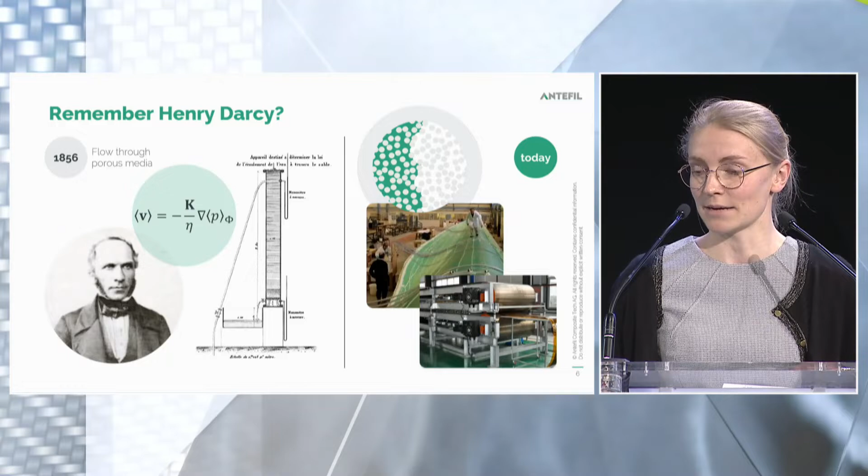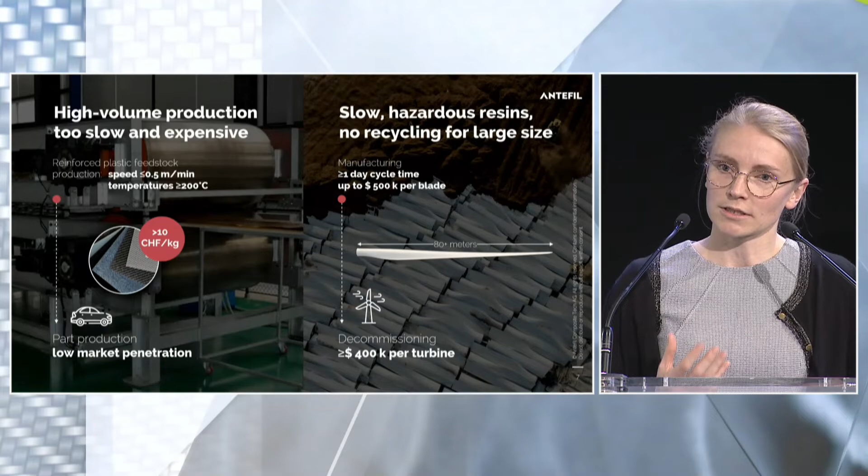For automotive applications, large series production is today achieved by rapid stamp-forming organosheets. However, these organosheets are produced by impregnating dry textiles with high melt viscosity thermoplastics at high pressure and low line speeds. This makes these preform materials expensive and limits their use in such a cost-sensitive market.

The other example are large composite structures like wind turbine blades that are today produced using vacuum-assisted resin infusion. Because of the curing of these resins, the production is slow and expensive. And because these resins cannot be recycled, we are producing kilotons of composite waste each year.

At Antefil, we have the solution. Our technology relies on hybrid fibers, glass fibers that are individually coated with a precise amount of thermoplastic polymers on them. Textiles made from these fibers turn into lightweight structures almost instantaneously, simply by applying heat and a little pressure.

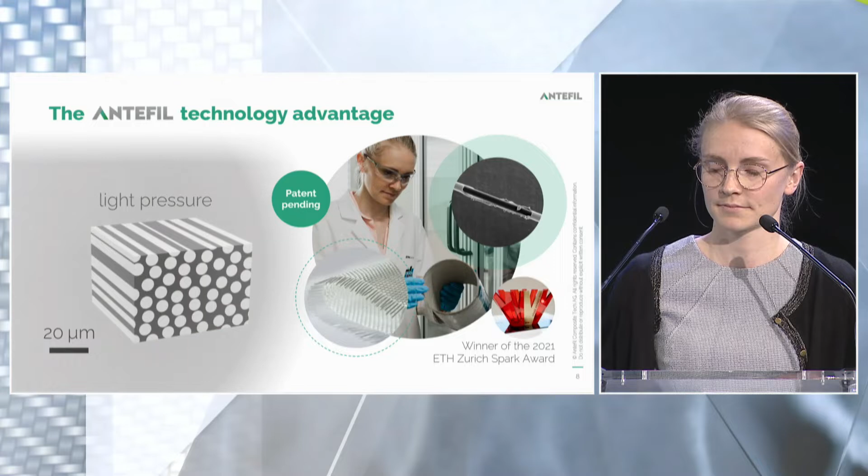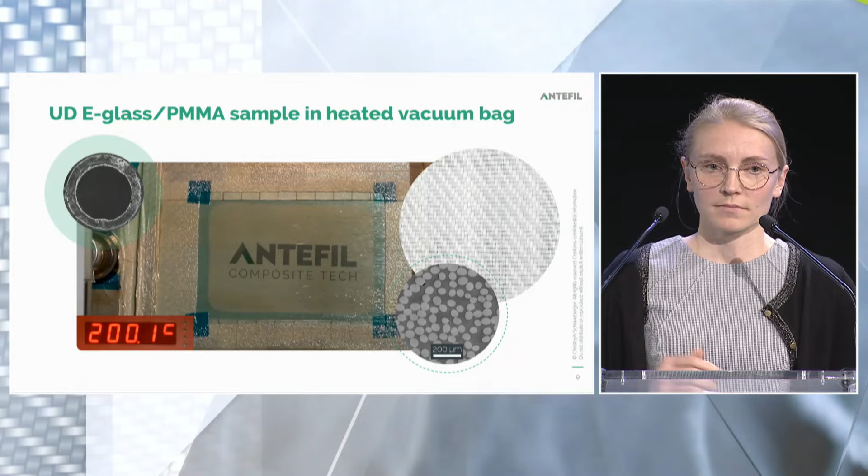We have successfully demonstrated the production of sample-sized textiles with our lab-scale fiber spinning prototype. These textiles can be consolidated into high-quality laminates with low-pressure consolidation, like vacuum bagging, because we combine reinforcement and matrix in every fiber. This ultimately enables the use of thermoplastic composites for large structures, but also parts with high lot sizes.

And now to Christoph.

Thank you, Nicole. So by entirely circumventing time-consuming impregnation and enabling a full fiber wet-out, Antefil's hybrid fibers reduce the cycle time in part production while improving the material quality.

And because we enable the use of thermoplastics, we offer our customers alternative joining processes such as welding. We don't have to work with hazardous thermosetting and curing reactions, and enable recyclability at the end of the product life cycle.

While various applications are conceivable for this preform product, we have secured interest in niche applications, the construction markets, and in automotive, and are running pilot projects with prospective customers there.

The experience gained with these pilots will allow us to then also enter larger markets like pressure vessels for hydrogen mobility, the aerospace sector, and wind power.

We will strategically position Antefil on the material side as a producer of hybrid fiber textiles. We envision an asset-light production model for which we will collaborate with established fiberglass producers and textile companies.

We will incorporate our developed coating stage into their spinning plants, and we've already signed interest from established fiberglass manufacturers and weaving companies for this purpose.

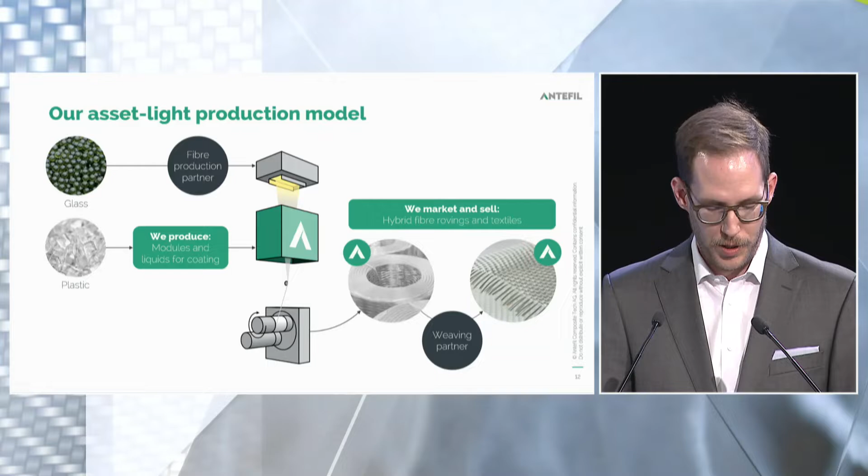So the team behind Antefil is an interdisciplinary team with complementary characters, and we combine over 50 years of experience in the composite sector. The core team is made up by Nicole, Paolo, Thomas, and myself.

And as an ETH Zurich spin-off based in Switzerland, we have spearheaded the development of this technology at an academic level. We've also been able to attract highly trained staff and top student interns for our technological and market efforts.

We are on a mission to advance the standard in composites production. And to scale our fiber production capacity, we are now offering an equity investment opportunity until the middle of this year in the size of $2 million US.

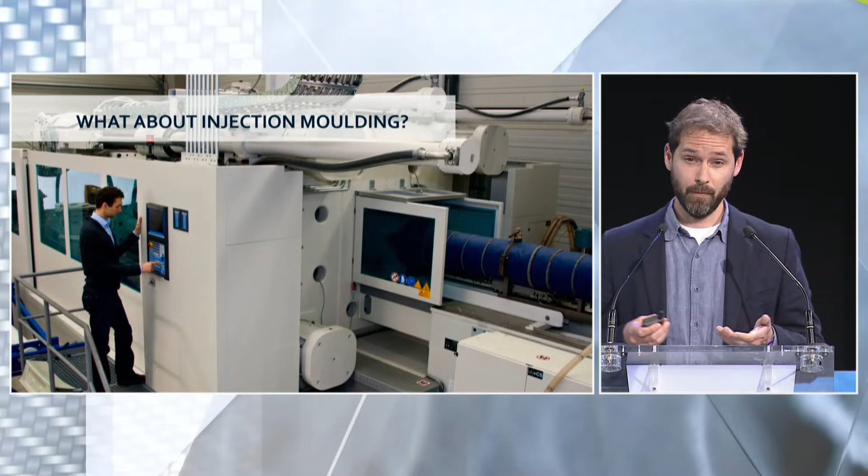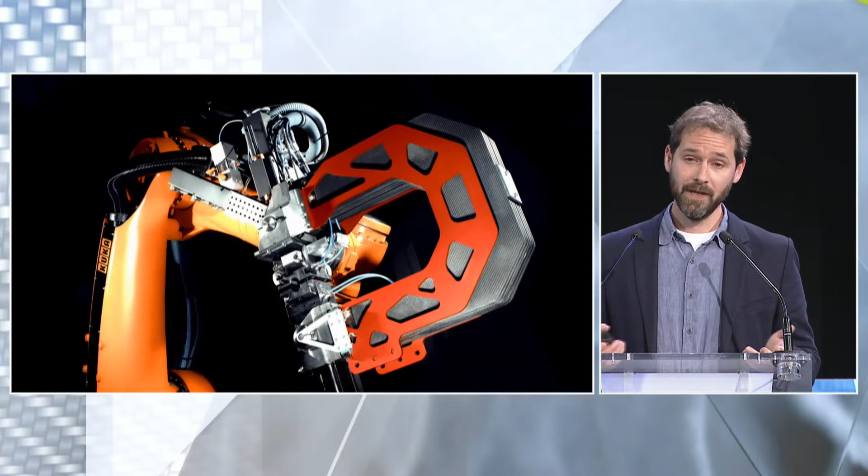For example, injection molding - the most common used manufacturing process in the plastics industry. I'm not saying it is outdated somehow, I'm just saying it is stationary. Again, what could be the next thing that happens to the injection molding technology? We can make it mobile. We from ANYBRID have succeeded in creating the world's first mobile injection molding machine.

And with that, we are leading to whole new flexibility and productivity in plastics processing. We call this machine Robin. Robin consists of a lightweight C-frame and is characterized by a weight of only 140 kilograms. Like this, it can be mounted on classical industrial robotics. Besides that, it's characterized by the big outreach capacity on the inside of the C.

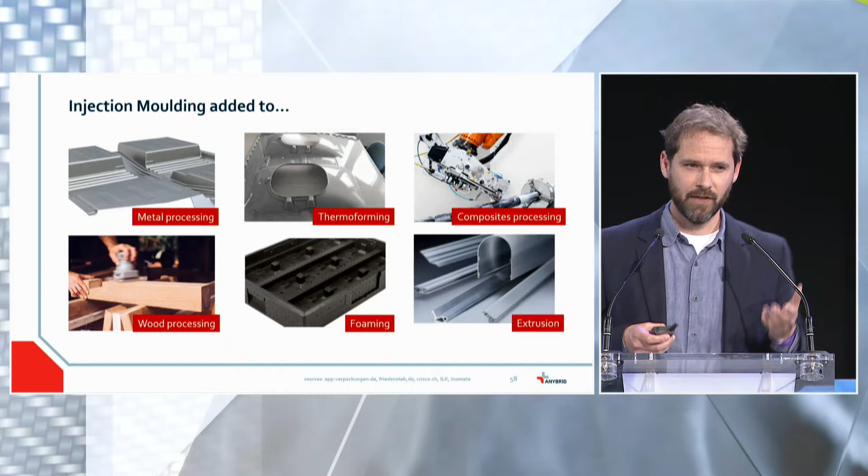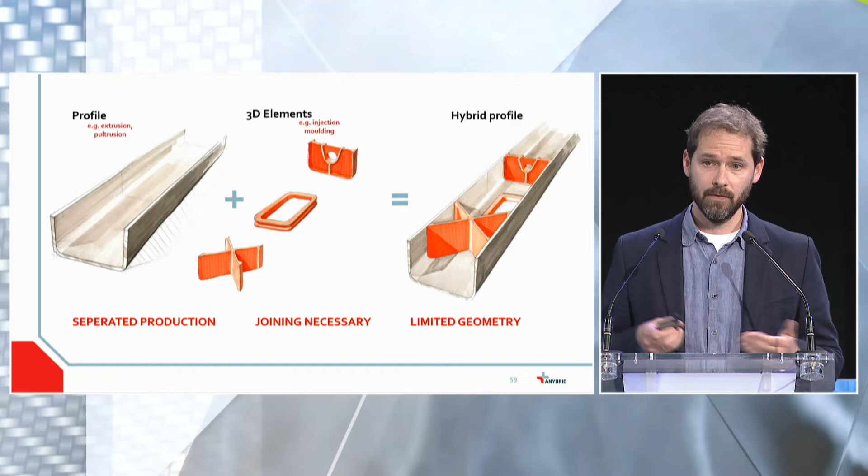So what can we do now with this machine? We can add it to other manufacturing processes like metal processing, thermoforming, or composites processing, or even wood or foamed material can be overmolded with our technology. But just think about the technologies, how we can overmold profiles in line. Because today, profiles and injection molded elements are completely separated when it comes to the production of them. There's always additional joining necessary, and the geometry for such hybrid profiles in the end is limited.

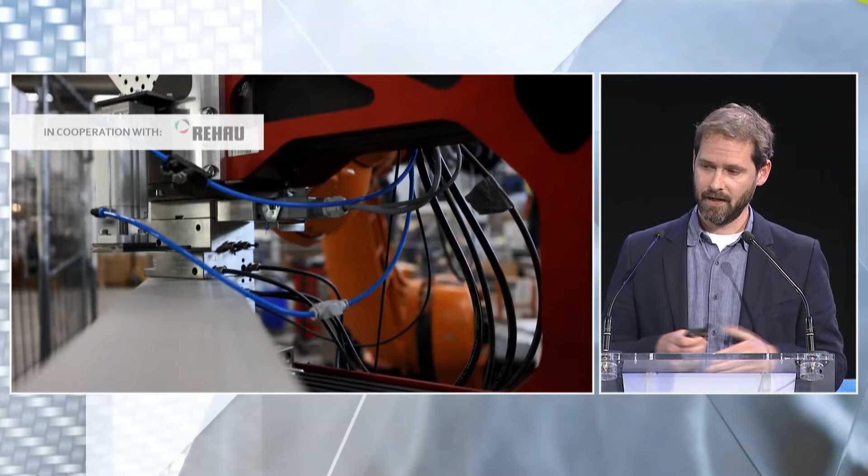We use this in cooperation with our first big customer, REHAU, one of the biggest plastics manufacturers in Germany, to test it inline during an extrusion. We are just flying by the profile, overmolding it with a functional element out of the same material.

And think about the market. There are over 5,000 profile extrusion lines that are sold in Europe every year, creating a turnover of over 2 billion euro.

And this is just, for us, the start, because we developed, with Robin in the center, an injection molding machine that can be directly integrated in a profile extrusion line, making it possible to overmold it directly in line. We are expecting to sell over 50 machines in the next 5 years.

And this is just the possibility to overmold in line. When it comes to offline functionalization, we are aiming for another market, the market of window frames. There are over 15 million windows that are produced and sold every year just in Germany and France, creating a turnover of over 1.5 billion euro.

And what is the most challenging part about windows is the assembly of them. And that's where we come in the game, because we created, with our Robin system, a joining concept to join the window frames directly with a higher speed, reducing the need for labor.

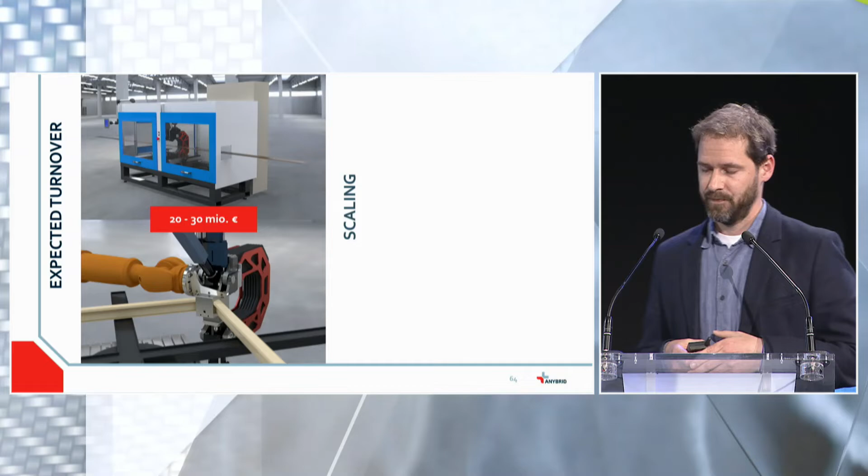in the traditional ways. We are expecting, with those and other applications, a turnover of up to 30 million euro in the next years. And we're planning to scale it on other areas in the automotive or aviation industry, or with other materials, overmolding metal or wood material. And we are already in discussion with a few manufacturers when it comes to joining technologies, joining C-frames.

Last but not least, I want to introduce you to the team. The team consisting of the one who keeps everything in his eyes, the mastermind, the networker, and the one who can just do everything. Altogether, we have experience of 45 years in engineering and have been multiply awarded in the last years.

With that, I want to finish my presentation. I want to invite you to think with me the next steps using our robotized injection molding system. Thanks for your time, and I'm looking forward to meet you at our booth in the Startup Village.

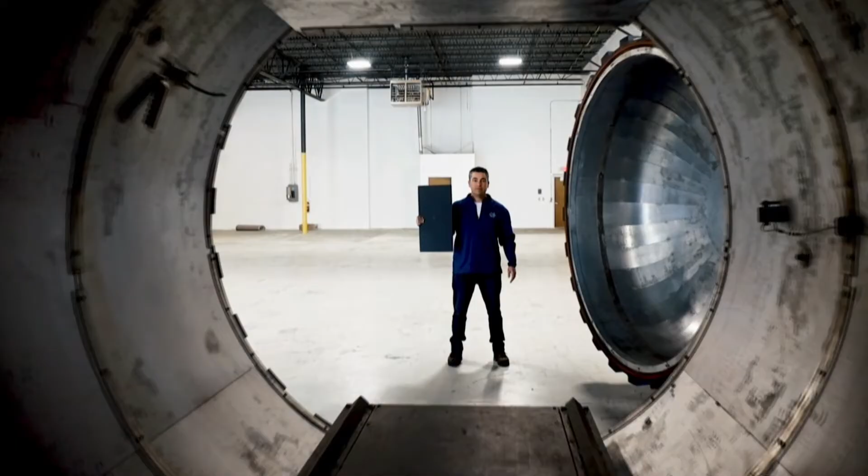Here's a quick picture of what Atomic 6 is all about. They said it couldn't happen, until somebody did it. This panel changed everything. Historically speaking, industry's best has achieved 80% of the theoretical limit for tensile modulus. This panel achieves 98%, just 2% away from perfection.

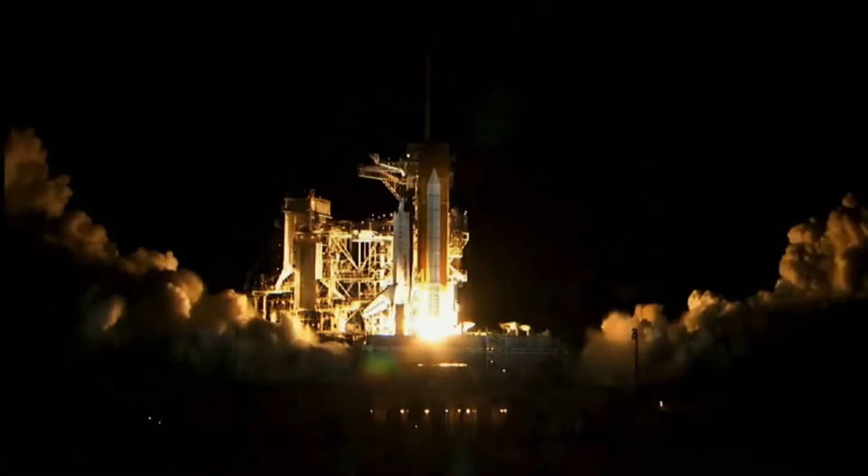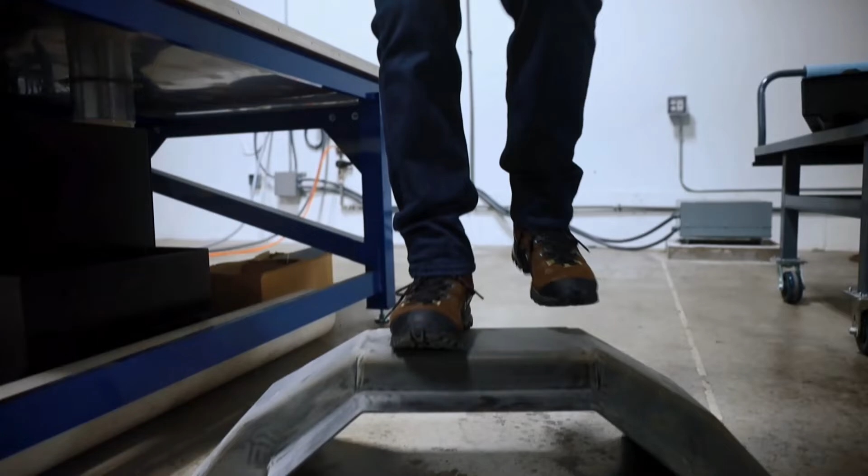We're applying our technology in 4 major verticals: space, aerospace, hypersonics, and ballistics. In space, we've made a chassis for a Mars rover prototype that's lighter than aluminum and stronger than steel. In aerospace, we've made a battery enclosure for hybrid electric aircraft. In hypersonics, we're developing a carbon phenolic panel to withstand speeds of Mach 5 - that's 3,800 miles an hour.

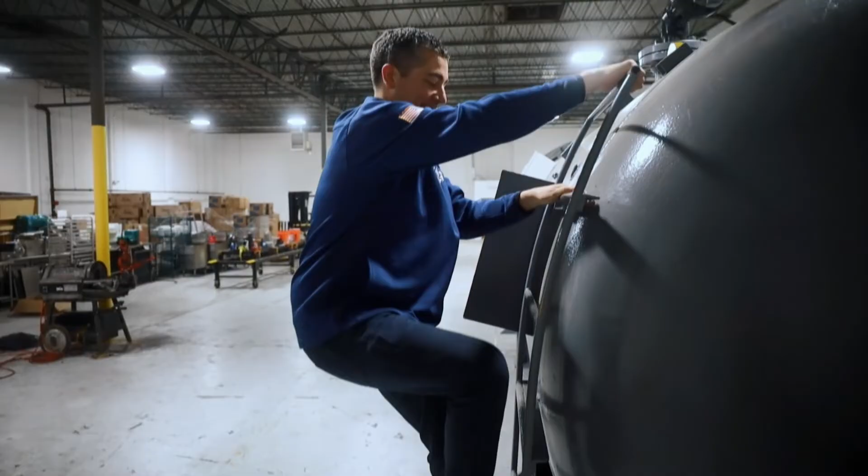In ballistics, our first attempt stopped a 9mm full metal jacket, beating the military standard for weight and thickness. The products we're making in each of these verticals have interstate, international, and interstellar implications. At Atomic 6, we invite impossibility, because we know impossible is the first step toward an entire generation's dreams coming true.

I'm sure you're all aware that prepregs are the benchmark material for high performance. You also know the problem with prepregs: they're expensive, have excessive resin waste, limited recyclability, stored in a freezer, and typically require long curing cycles. The benefits are that prepregs have well-established properties that have been certified for many programs and have a high level of performance.

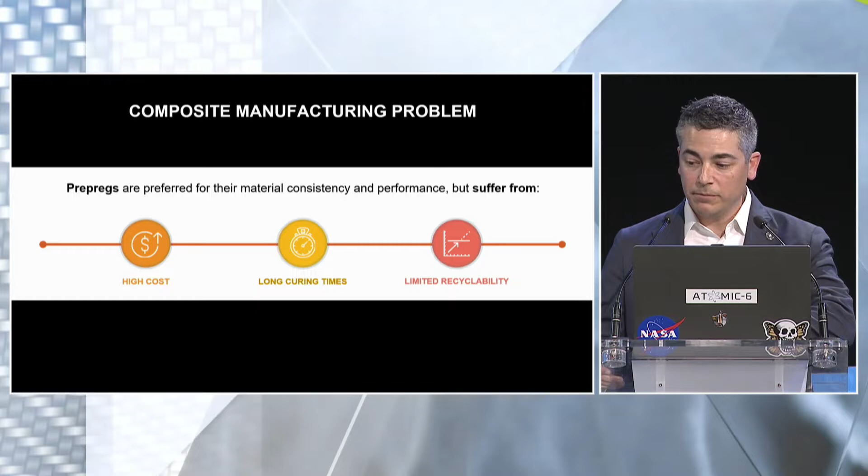We're disrupting aerospace, providing performance previously thought impossible - 120 times faster manufacturing at a fraction of the cost. Our proprietary mold design allows for all fiber and infusible resin types. I have 2 chassis here from the same mold. The first is an IM7 woven carbon fiber with high-performance thermoset, while the other utilizes recycled chopped carbon fiber and a recyclable thermoplastic resin system.

To meet growing demand for sustainable aircraft, we must utilize composites while drastically increasing production capability. The Atomic 6 process is purpose-built for opportunities just like that.

Over the next 2 years, the world will launch more satellites than in all human history combined. Space Force has funded a $750,000 project for us to develop higher performing support structures for solar arrays like the ones on the International Space Station. Once proven, this technology could help bring 5G Wi-Fi to every single corner of planet Earth through projects like SpaceX's Starlink and Amazon's Project Kuiper.

The next generation of fighter jets won't have pilots in the cockpit. The Air Force Research Lab has funded a $750K project for us to improve critical structures on its unmanned combat aerial vehicle.

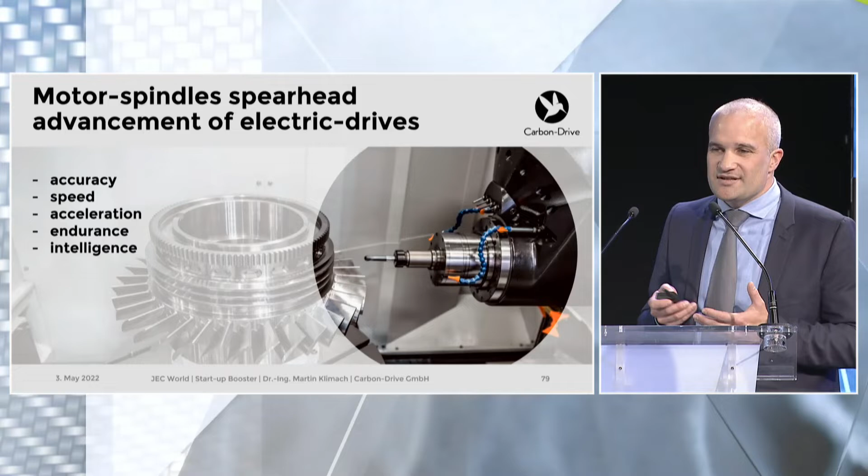So it stood to reason that if we make a carbon fiber motor spindle that can machine at the same speed and precision as a steel spindle, we would not only make a big impact on the machining industry—and which industry doesn't rely on machining—but also in the long run on electric drives in general. So after countless hours of research and meticulous product development, in the middle of 2018 we had our first all-carbon electric motor spindle. It can machine aluminium up to 4 times faster than a steel spindle at half its weight. It shows no thermal deformation, and in the milling process saves 40% of energy.

The first prototype is actually still running today in our production as our day-to-day spindle. But back then, we had something maybe even more important: we had formed the perfect team.

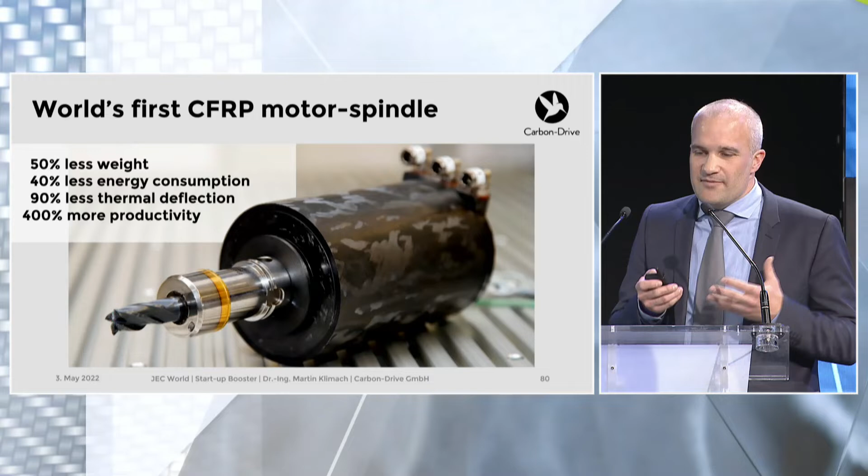We have Alex, who is our exceptional economical expert. We have Jan, who is a very patient, precision perfectionist, and me, a modest mechanical mastermind. Boosted by our research and confident in our abilities as a team, it was time for the project Carbon Drive to become the company Carbon Drive.

So where are we today? Today, I stand before you as a founder of a composites company that couldn't be more excited about the future. We have received local, national, and international awards and grants. We have many research cooperations with technology leaders, but most importantly, we are right now building the first 2 models of motor spindles, of all carbon motor spindles, that will go into serious production and will set the new gold standard for energy efficient machining.

They are about to produce 10 million euros per year in revenue. So, I have told you everything about our team, about our great technology.

I hope I could convey our vision of the future of electric drives, of energy efficient electric drives. And if you feel you share this vision, if you want to contribute, or if you feel we have maybe other applications that we haven't thought about, please reach out to us. We are very happy to get in contact with you. Thank you. Ladies and gentlemen, hands together for Carbon Drive.

Wonderful. Again, let's go over to our jury members and hear what they feel about what they've just heard.

Yeah, thanks for the interesting update on spindle drives and the production behind that. Can you give a little bit more insight on how deep your vertical integration in the process is? Are you only designing it, or are you producing it, selling it? How far does it go?

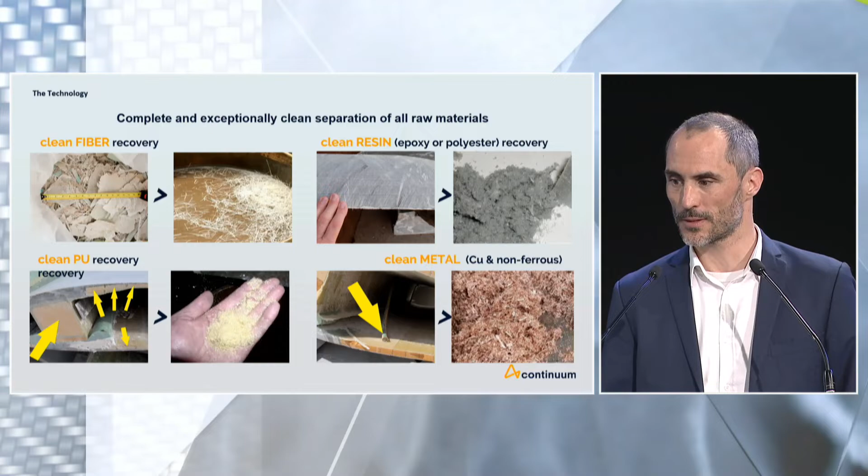The product is the Continuum high-performance composite panel. Again, 92% recycled material. It's got really outstanding technical properties, and that's what actually gives us the opportunity to compete against many different products within the building and construction industry. Some of these products, you see drywall, you see facades, bathrooms, even doors, sound barriers, up to competing against virgin fiberglass panels in certain applications.

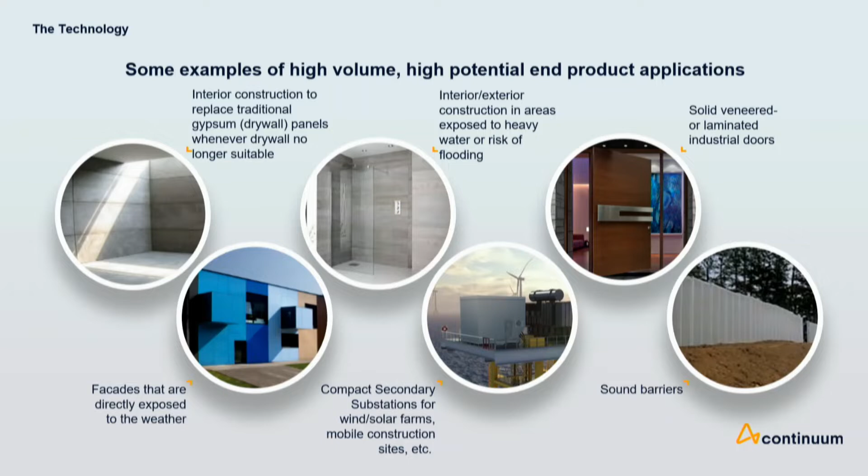You see a compact secondary substation here. These panels have really outstanding technical and green properties, and we expect to sell in the next 3 to 6 months 15 to 20% of our output.

Our first factory is planned together with the Port of Esbjerg. We have 100,000 square meters of waterfront property at the leading offshore wind port in the world. We have agreements in place with all machine suppliers, so in other words, we're ready to go.

Now, we see this as a winner-take-all market, and we believe that we have the technology, the product, and the business model to be one of the leaders here. We're planning, in addition to the Esbjerg, a second factory in the UK, and by 2030, we want to establish at least 6 factories in Europe.

To close, if you're a feedstock provider, if you're in the media and you want to help us tell our story, or if you feel that we can partner in any meaningful way, please get in touch. We'd love to talk to you. Thank you very much on behalf of all of us, and we look forward to your questions. Ladies and gentlemen, hands together for Continuum.

Actions speak louder than words, although right now we're going to hear the words of our jury members about what they've just heard. Thank you very much for this presentation. Very exciting. I think everybody contributing to circular economy really deserves an applause.

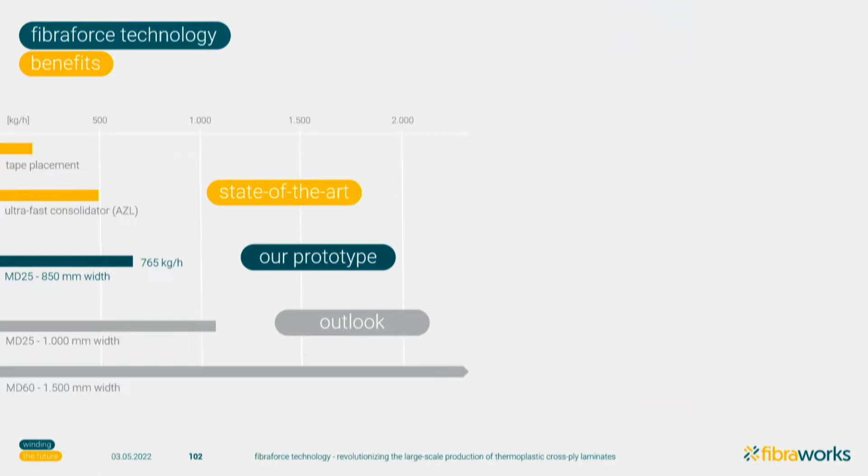So what are the main advantages of Fibraforce technology? On one hand, it's improved productivity compared to state-of-the-art processes. We've got 50% higher output than industrialized state-of-the-art processes, and in the outlook, a later production machine with increased width could even realize 4 times the output.

So Fibraforce technology provides a continuous process, providing customizable, multi-axial and multi-layered cross-ply laminates at affordable cost. And this could be a game changer in the composite industry.

So what are the market potentials for Fibraforce technology? Thermoplastic materials are more often used across all industries: aerospace, automotive, battery casings, infrastructure, and transportation. The thermoplastic composite market is growing fast at about 7.5% annually, and the market for organosheets and UD tapes is growing even faster.

To illustrate the capabilities of Fibraforce technology in providing affordable thermoplastic cross-ply laminates, just consider the following numbers: our prototype can deliver 1,000 tons of material a year in single-shift operation, resulting in a sales volume of at least 15 million euros, a market share of 1.7% relative to 2020.

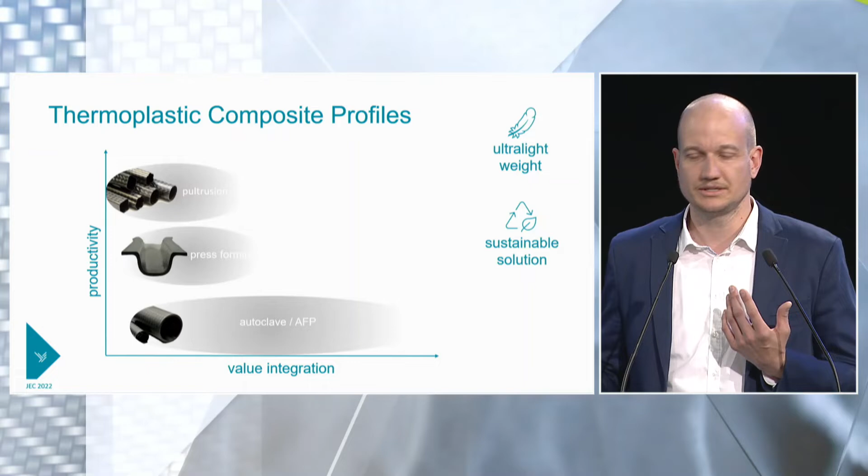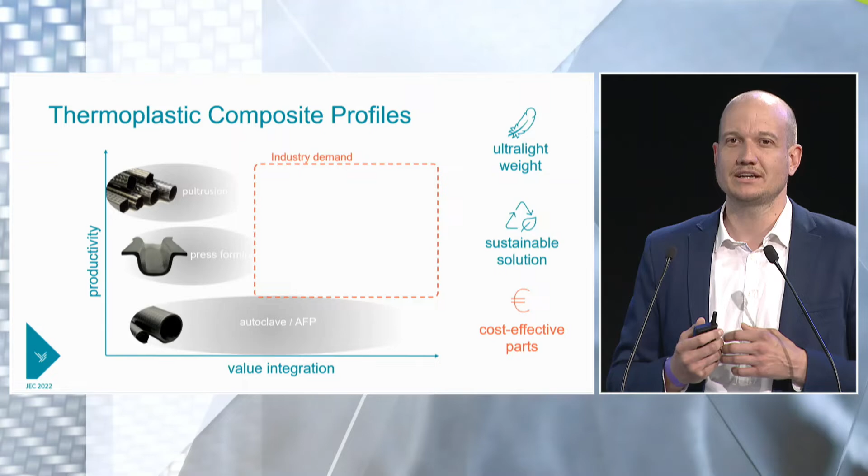With composites, you can make ultralight profiles, but we think thermoplastics can make them more sustainable as well. Current technologies either offer super high productive processes like pultrusion, or processes that integrate additional value into the part, like autoclave technology. The demand we see at Herone is for really productive manufacturing of composite profiles where you can integrate additional value directly within the manufacturing process, making those parts more cost efficient than current solutions.

What we do at Herone is invent and produce thermoplastic composite profiles where the functions required for using those parts are directly integrated into the parts. Here you can see PEEK profiles, for example a PEEK tubular structure where the fitting is a co-molded PEEK, making one robust, ultra-light structure entirely from thermoplastics.

Our vision is that with this we provide more sustainable solutions, for example to make aviation emission-free, like with hydrogen pipes or storage solutions.

Core of what we are doing is the technology, which we call Herone technology. It's a two-step approach. We always start from thermoplastic tapes, pre-impregnated tapes, with a textile process - a braiding process for automated deposition of that material, making tailored preforms, so-called organo tubes for profile structures.

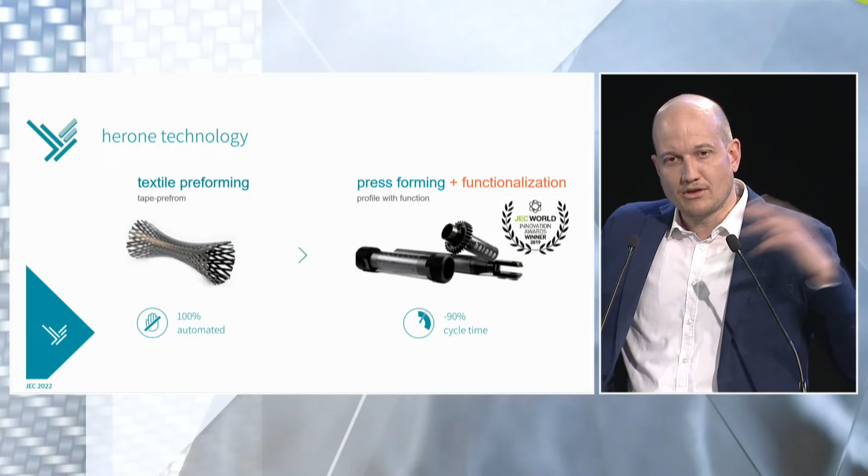Our main asset, of course, is our Herone team. We are a mix of material engineers, lightweight engineers, and aviation engineers. With that team, we scaled this technology to a full production line and achieved aerospace certification last month. So with that, we are now production ready to get started manufacturing those parts.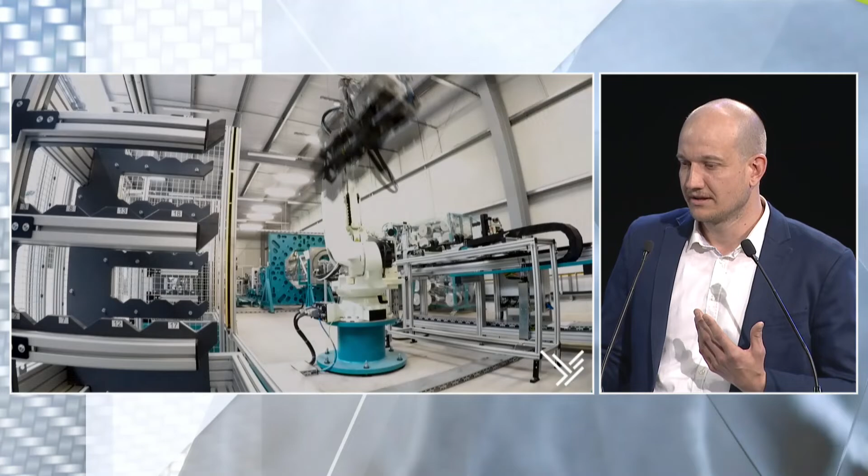And this is a quick impression into what we did build up.

The parts that we are focusing on are of course all hollow profiles, and we categorize them. The first one is where we change the geometry, for more geometrically complex profiles, like struts and shafts where load introduction or gears are directly co-molded onto the composite part.

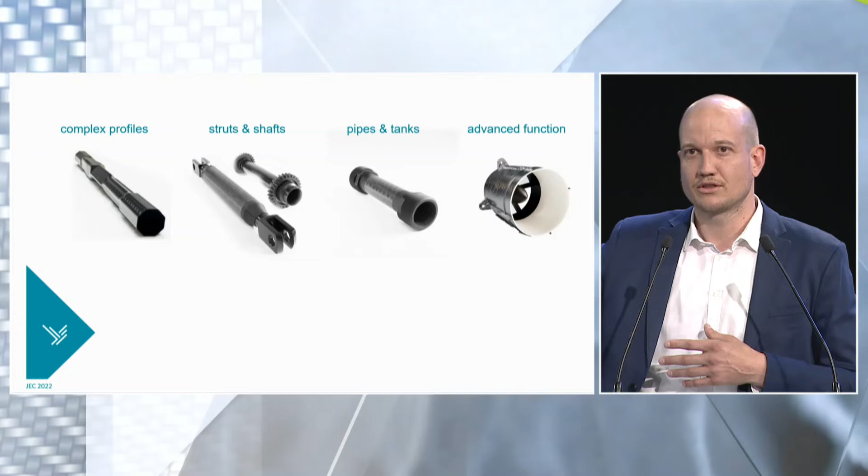Then, as I already mentioned, pipe structures with integrated fittings or tank solutions. And the fourth category we call advanced function, where multiple other functionalities are directly co-molded, like ribs, stiffeners, or attachment points.

So with that said, we are having a solution now and are looking for appropriate applications. And of course, you're welcome to contact us for the challenge you have in mind for such parts.

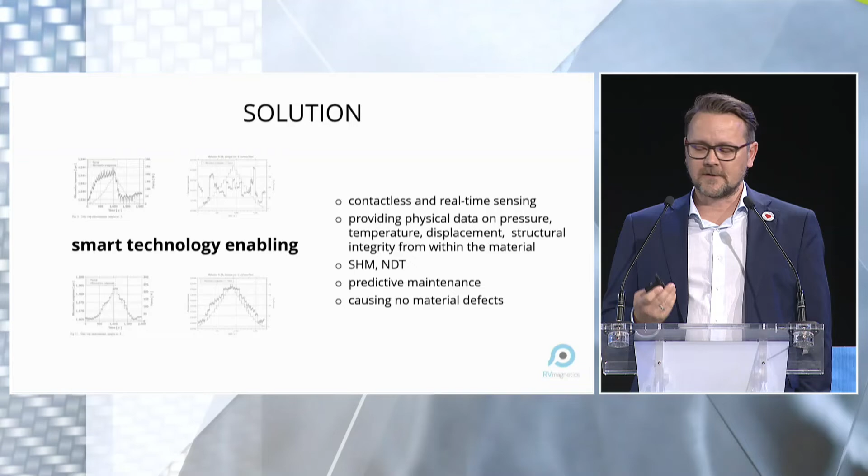How do we do that? Our sensor is able to respond in a contactless manner, allows real-time sensing, and helps you mine the physical quantities of pressure, temperature, displacement or position, if you will, and also structural integrity.

Our business model is basically divided into 3 main steps. Typically, the first one is getting to know the client and providing them with a feasibility study, which is a quick step that qualifies us to go next to the customization, a lengthy and more cost-intense period where the outcome for the client is a prototype. The third and most important step is where we are becoming less of an R&D organization and more of a supplier of the actual microwires or the sensors themselves, and we need to align with the client's go-to-market strategy.

What are the benefits and impact of the technology? We are allowing our clients structural health monitoring on the run, in situ monitoring, non-destructive testing, and if paired with proper software or artificial intelligence, it's also predictive maintenance. So one way or another, it's modifying your composite and turning it into a self-monitored one.

On a sustainability count, we see ourselves replacing several sensors, interfacing with one, gathering data on temperature, pressure, magnetic field, structural integrity and displacement, helping reduce carbon footprint by replacing metallic parts or metallic materials with composite ones. And as a company, we don't need to establish a global plant network because we're able to basically produce 100,000 sensors from 1 gram of metallic alloy within 10 minutes.

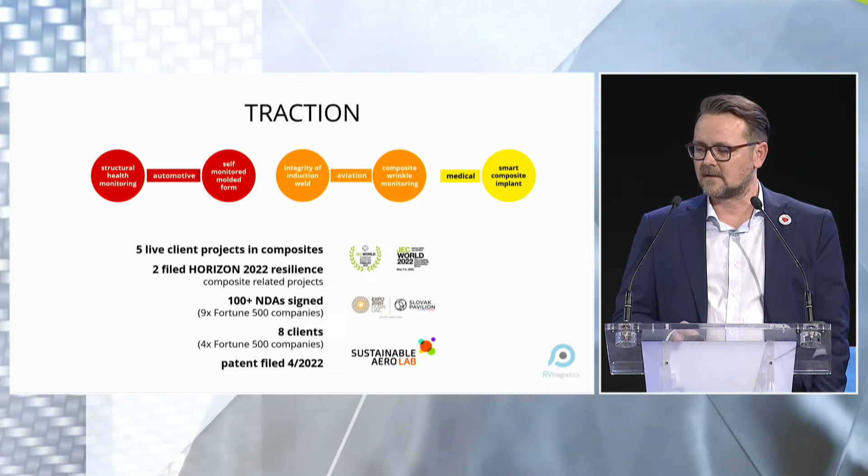Also, the company filed a patent earlier last month. The team is based on our CTO, Professor Varga, who's also an academician himself with an impressive track record and who spent 25 years developing the technology.

What are the needs of the company today? We're obviously looking for adopters, client integrators, and strategic partners and investors later this year to not only productize the fully developed technology, but see through the projects to the very end. Thank you for your attention.

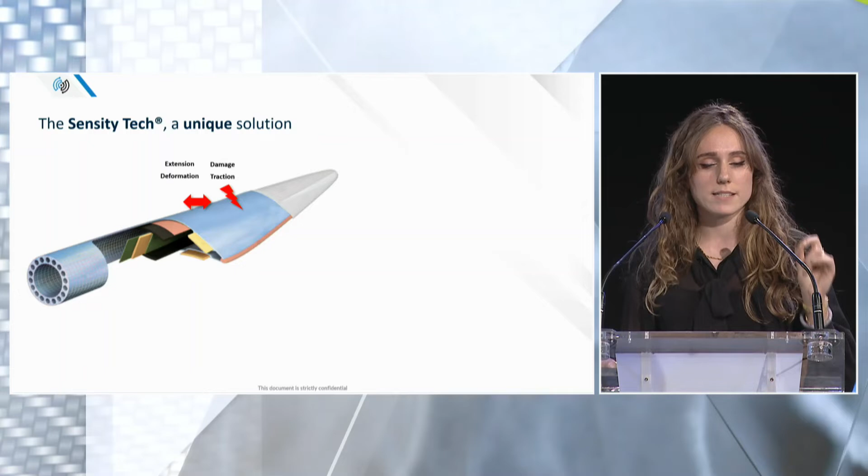So it is an embedded system which is connected to the periphery of the material, sending a signal inside the material and then receiving it. After that, we use a processing system with our own algorithms of artificial intelligence and mathematical models to compare both signals, and then we can detect an interaction.

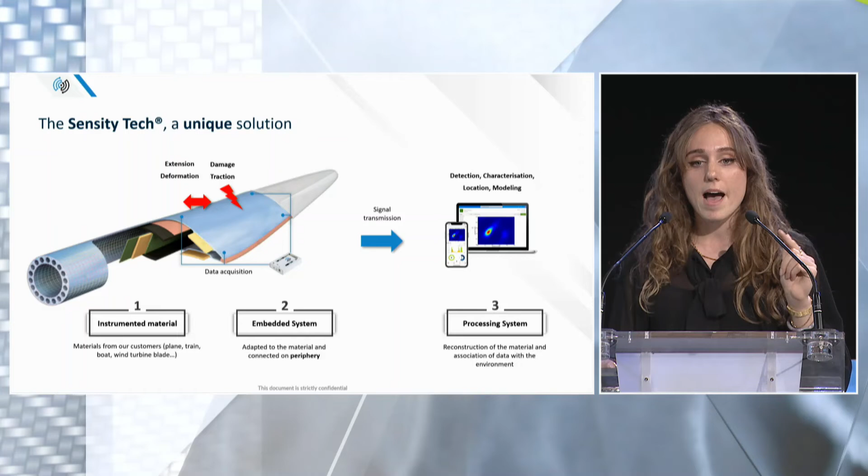We can also measure it, characterize it, and locate it as a 2D or 3D mapping, as you can see behind me on the slide. The added value of the Touch Sensity Tech compared with existing technology on the market is that it is a non-invasive system, so we respect the mechanical properties of the material. It can allow real-time analysis, and also adapt to large surfaces and any topologies, whether complex or simple.

It can also allow access to all information such as pressure, traction, deformation, and internal damage, and also allow a global vision, both a surface vision and a volume one, because it is your material that becomes our sensor. So the Touch Sensity Tech allows us to meet needs in structural health monitoring as predictive maintenance, which is a growing sector of 25% per year, and which represents 1.5 billion euros in 2024 in the transports and aeronautics and space markets. We are able to do structural health monitoring on planes, rockets, boats, trains, cars, etc.

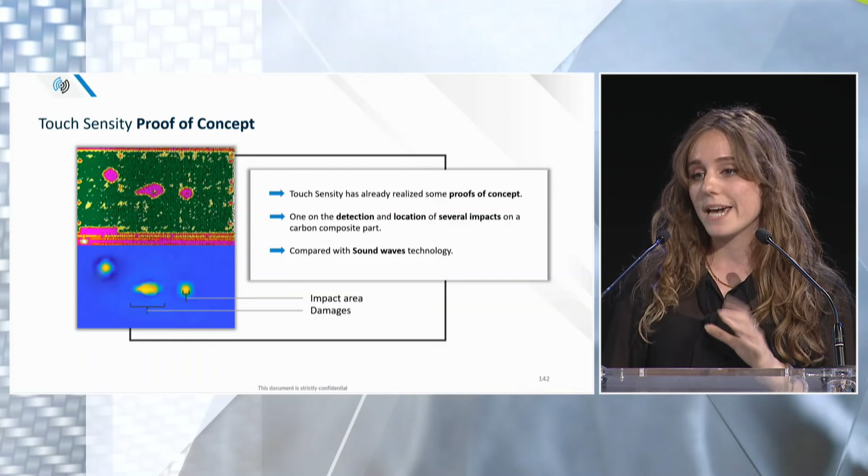Here is a proof of concept realized by Touch Sensity, which is a comparison between sound wave technology on top and the Touch Sensity Tech at the bottom, which consists of detecting 3 several impacts in real time. And so we can see, using the Touch Sensity Tech, we can differentiate the impact area, the damages, and also the elastic deformation caused by these impacts.

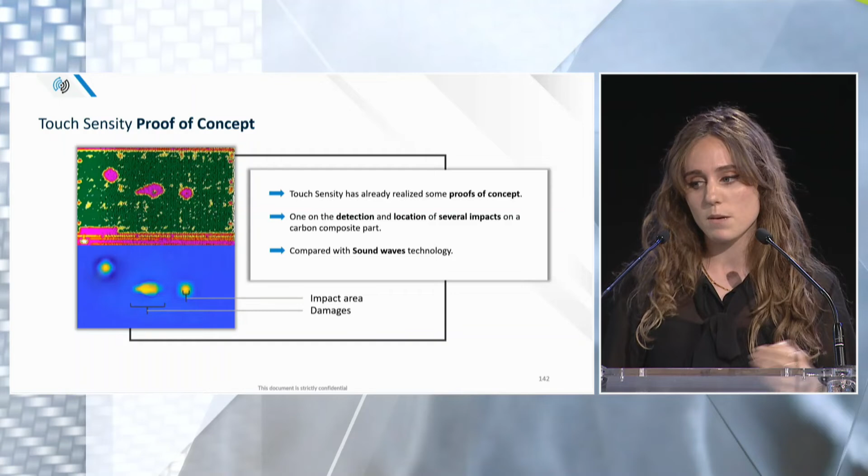In addition to all of this, the Touch Sensity Tech also has a sustainable impact, as it can reduce material consumption, materials scrapping, and can also extend the life of parts. We only use recyclable hardware systems too. For industrials, it represents a benefit of 25% reduction on labor costs on maintenance structure, which represents a reduction of 7.5 billion euros on the maintenance markets.

Sensity is also a 2-year-old startup with 6 proof of concepts realized, 2 patents filed, 1 fundraising of 1.5 million euros realized, a second one in preparation for 2022. It's also 1 partnership with Airbus Developments and several collaborations with Ariane Group, SNCF, Valeo, Naval Group.

Our business model is in 3 several steps. The first one is a specification study, sold in collaboration with our customers. The second one is the embedded system sale, and the third one is the launch of a software license.

It's also a 12-person company with 2 co-founders, a CTO and a CEO, 8 technical people on 3 different departments: the materials and polymers department, an embedded system department, and also an artificial intelligence and software department with 1 project leader. At Sensity, we are all engineers, and some of us are doctors. All of our technical team members are experts in their fields.

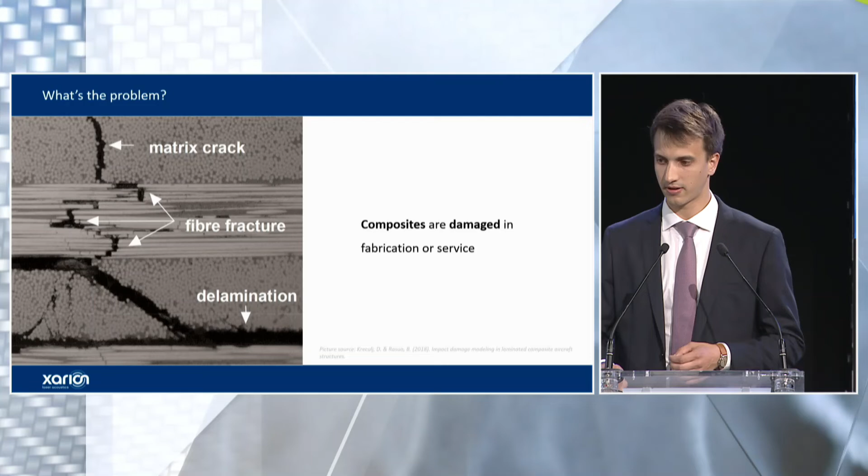You are manufacturing composites or using them in your products, and what you don't want is a structure like that. A structure with cracks, fracture, and delamination. This can make your structure fail. In the worst case, your airplane falls apart, humans are harmed, and you are at risk of going out of business.

To prevent this, you need to inspect your structures. And this inspection problem is a $2.5 billion market. Now, we at Xarion are entering this market with a novel contact-free technology for ultrasonic testing.

Now, ultrasonic testing is quite a standard thing to do, and you might ask why. Why is there a need for a new technology, and why go contact-free? Let me take you to the shop floor to show you how such inspection is currently done.

The first thing you would find out is that all conventional ultrasound technologies are contact-based. That means you require a contact liquid between your probe and the structure. And this is bad because it's not sustainable and it's resource intensive, and you require a complex system for liquid waste management.

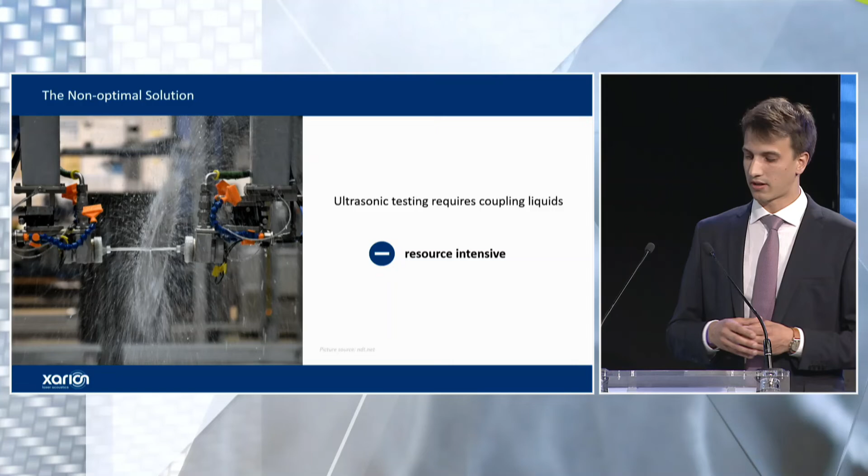But that's not the only issue. Contact probes are pressure and positioning sensitive, and this means it's hard to put them on a robot. And for a wide range of applications, manual testing is still the industry standard.

Now you could solve this problem by going contact-free. And we at Xarion, we have expertise in ultrasound and in lasers, and we decided this is quite an interesting problem to work on.

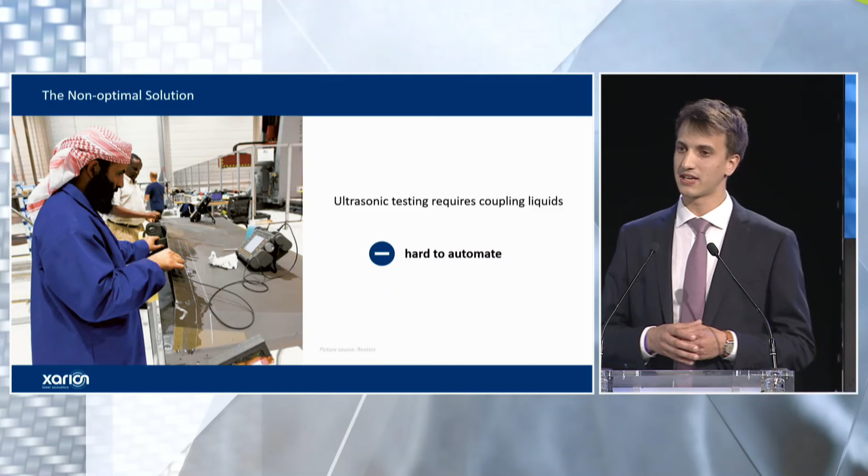What we came up with is a contact-free probe, where we use lasers to generate and detect ultrasound. Our technology is very unique, and we have 27 patents issued.

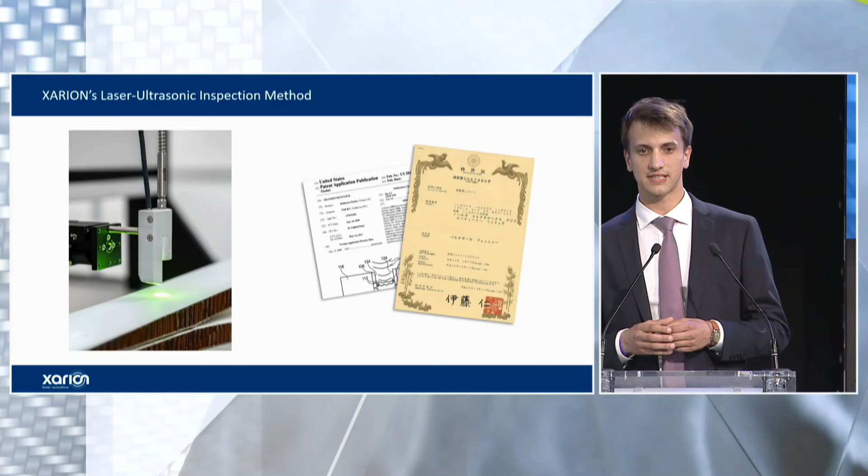Now, for doing your inspection, you just require an air gap between the probe and the structure, and by scanning over surfaces, you can image the internal structures. For example, we did this for a honeycomb sandwich panel, and you nicely see how we image the internal honeycombs as well as a small-sized defect.

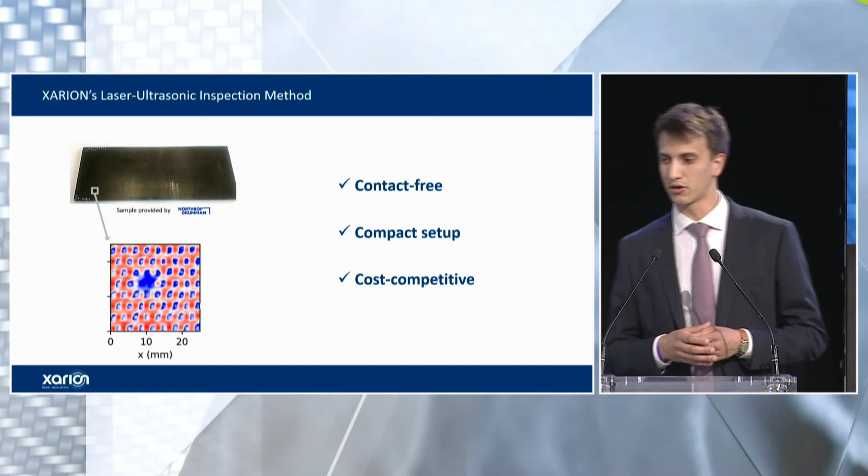We provide this as a turnkey solution with the required hardware and software for your inspection needs. And because we are contact-free and have a compact setup, you can easily put us on a robot. Additionally, we provide a good business case and can help you reduce inspection costs up to a factor of 10.

Let me tell you about our current traction. We have projects with companies such as Porsche and Airbus, where we put our inspection probe on robots and bring it to the production lines.

Our vision is to establish our contact-free method as a standard technology for composite inspection. And that's where you come in. I invite you to reach out to us and tell us about your inspection needs, because we'd love to collaborate and bring our technology to your inspection lines.

Finally, let me tell you about our team. We have 34 employees with backgrounds in all major engineering disciplines and core expertise in laser physics, acoustics, and material science. I'm Tobias, an application engineer with Xarion, and I'm looking forward to getting in touch with you and maybe already initiating our next projects together here at the JEC.